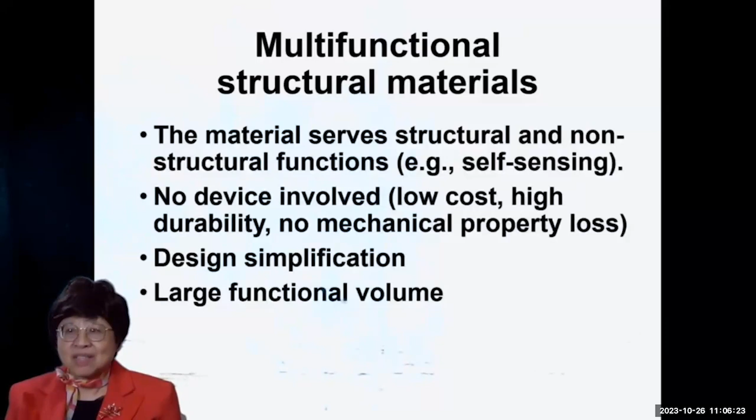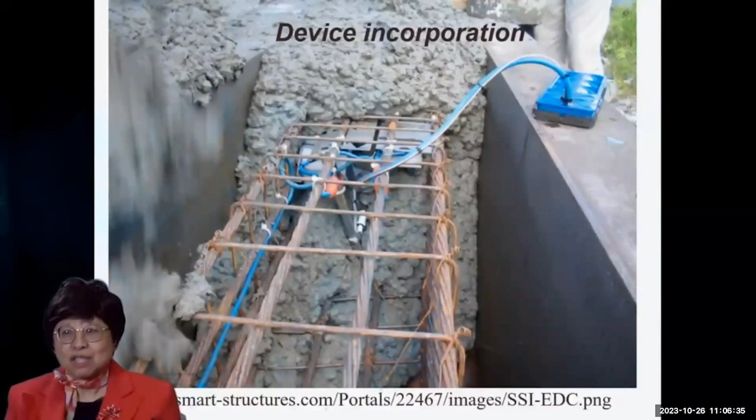If one incorporates or embeds a device in a structure, one has to do it while the structure is being fabricated, and subsequent repair might be difficult. In contrast, in self-sensing, there's no device involved. Rather, one measures certain electrical properties of the structural material using certain meters.

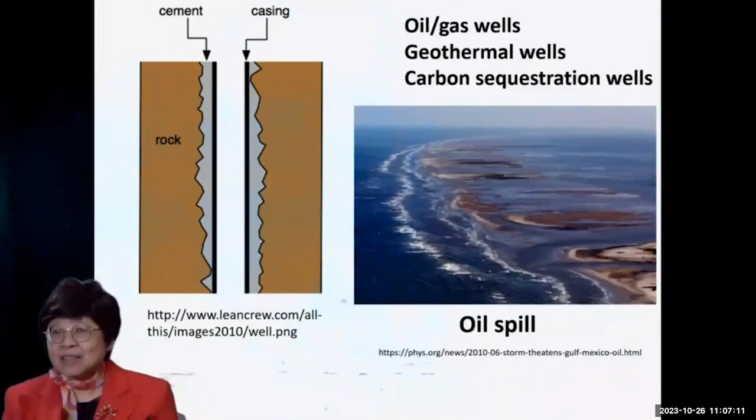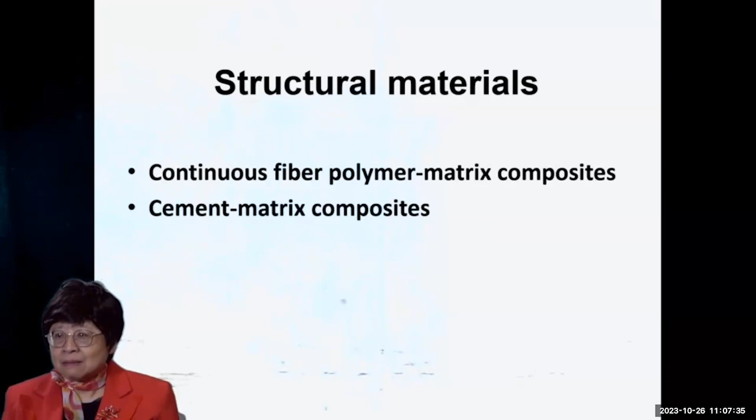The structural materials that I'll cover include continuous fiber polymer matrix composites as used for aircraft, and cement matrix composites as used for buildings and highways and so on. The attributes sensed include strain, stress, damage, and temperature.

The electrical measurements can involve measuring the resistance, capacitance, or inductance. I'm going to start with resistance.

Continuous carbon fibers are well known for their high modulus of elasticity, high strength, and low density, so they are widely used for lightweight structures. Aircraft increasingly use that, even cars and bicycles, golf clubs, and tennis rackets.

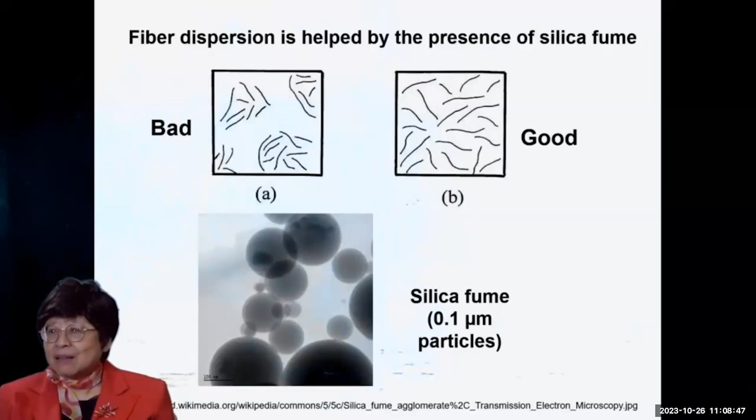Short carbon fibers look like this, and their dispersion in the cement is very important. It turns out that the addition of silica fume or fine silica particles into the mix helps loosen up the fiber clumps.

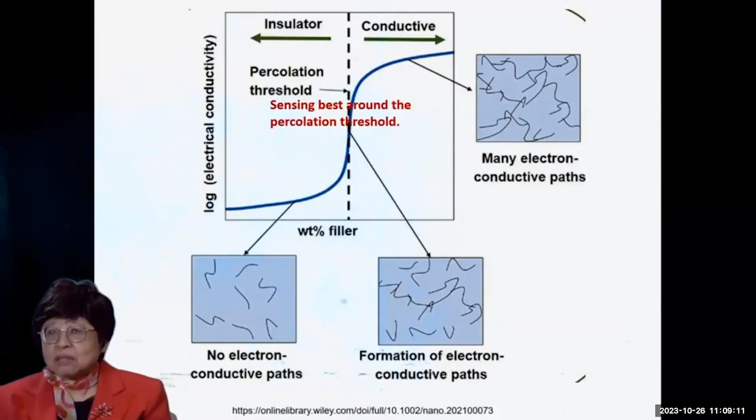The conductivity increases with increasing conductive filler content, in this case, short carbon fiber content. When it's above the percolation threshold, you have touching between the filler units, so it's conductive. The sensing is best if the composition is near the percolation threshold.

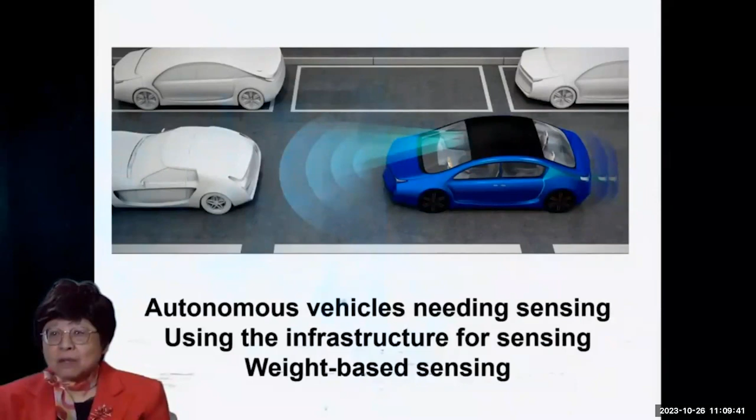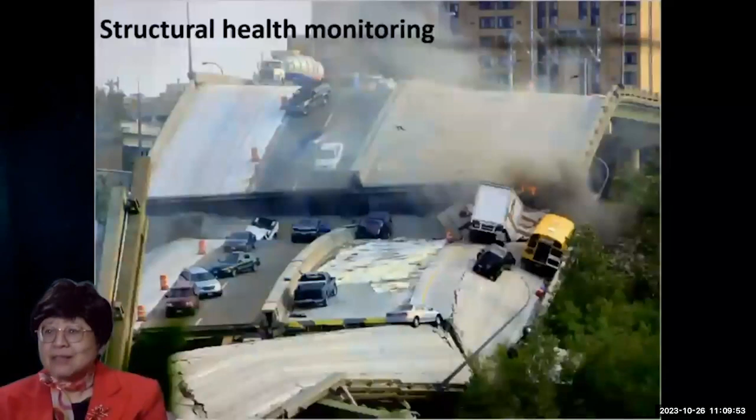Applications involve weighing the trucks as they move, also providing infrastructure to provide sensing for autonomous vehicles. This is weight-based sensing. One can also have building intruder detection provided by weight-based sensing with no camera involved, as well as structural health monitoring.

Electrical measurement sounds easy using a meter, but there are many pitfalls. For measuring the resistance, there are two methods: the 4-probe method and the 2-probe method.

As a result, there's no current going through the voltage probe, and the measured resistance excludes the contact resistance. However, if one uses the two-probe method, the measured resistance includes the contact resistance. And if one is trying to find out the effect of stress or heat on the resistance, it'd be even more troublesome for the two-probe method, because both the contact resistance and the specimen resistance may change at the same time.

Resistance-based sensing is largely based on piezoresistivity, which refers to the change of the electrical resistivity due to strain. The severity of this effect is called the gauge factor, which is the fractional change in resistance per unit strain.

There are three styles of resistance measurement: volume resistivity for sensing a volume, contact resistivity for sensing an interface, and surface resistance for sensing a surface region. I'll first talk about the volume resistivity.

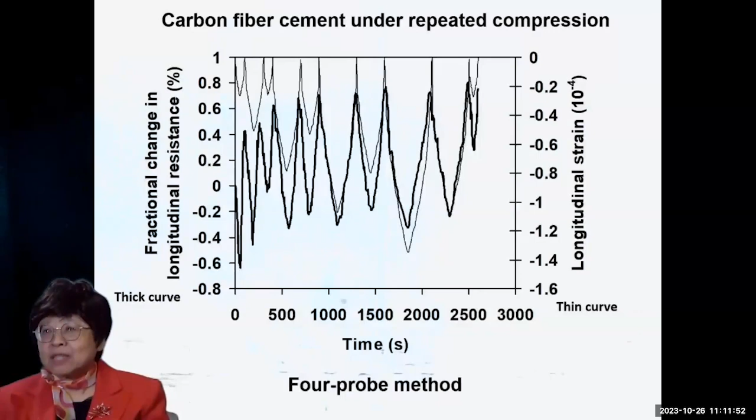This is carbon fiber cement under repeated compression. Shown in thin line is the longitudinal strain, and I have an arbitrary progression of strains at different amplitudes. The bold line is the resistance, and every time one compresses, the resistance goes down.

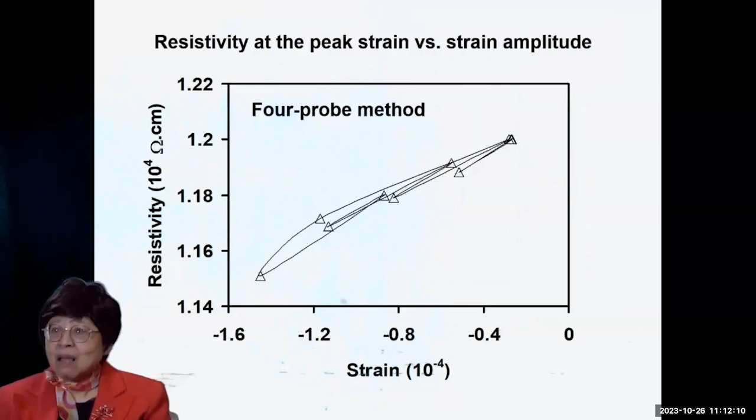I can plot the resistivity versus the strain amplitude, connecting the data points in chronological order, and one sees that it's kind of linear with not much hysteresis. That's done using the four-probe method. However, if one uses the two-probe method instead, it's a mess.

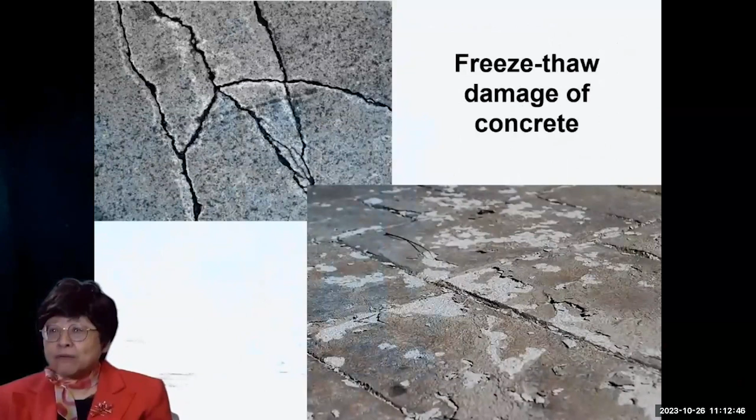Freeze-thaw damage is a trouble for concrete structures such as pavement, and this is because ice has lower density than water. We have been able to monitor the freeze-thaw damage in real time by resistance measurement.

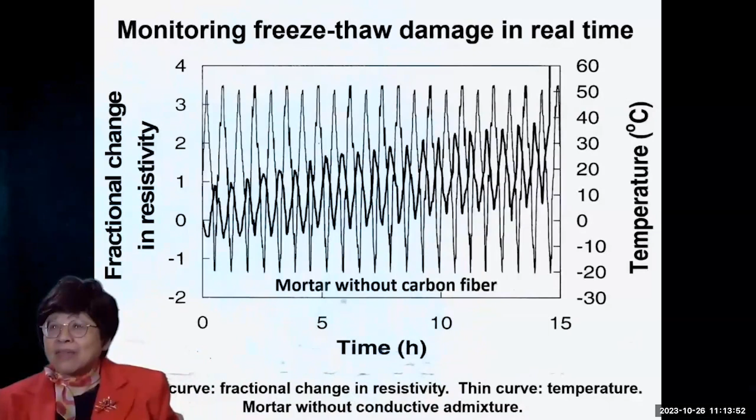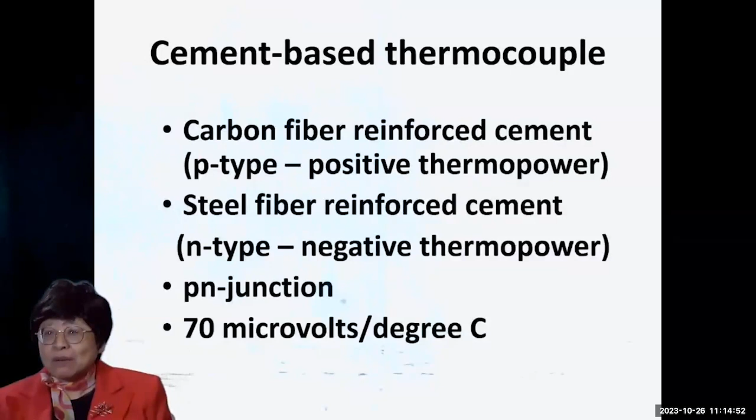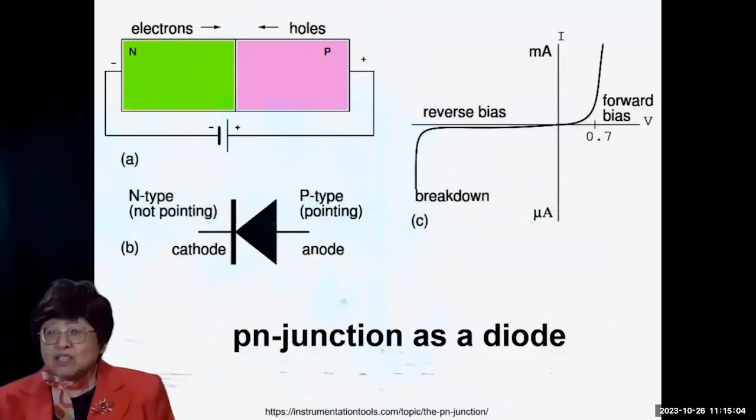Now, the p-n junction is famous in the semiconductor world as a diode. And for the cement-based p-n junction, we don't have a very beautiful diode, but there's some of that characteristic, with the current being more in one direction than the other.

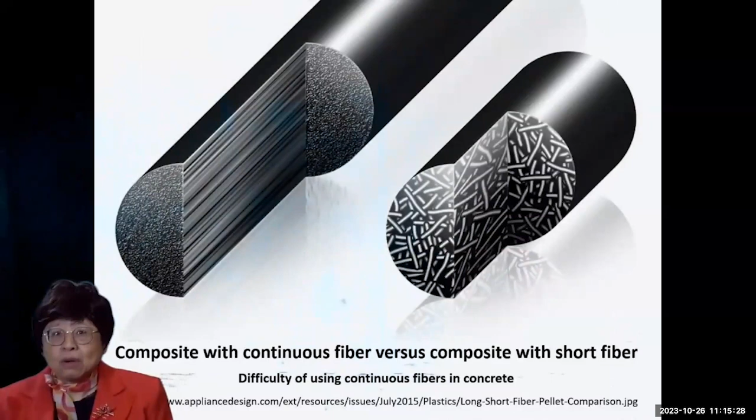Now let me turn to continuous fiber, which is more effective as a reinforcement than the short ones because the fiber-matrix interface is never perfect. Let's consider, say, epoxy, and we fabricate the epoxy matrix composite containing the continuous carbon fiber.

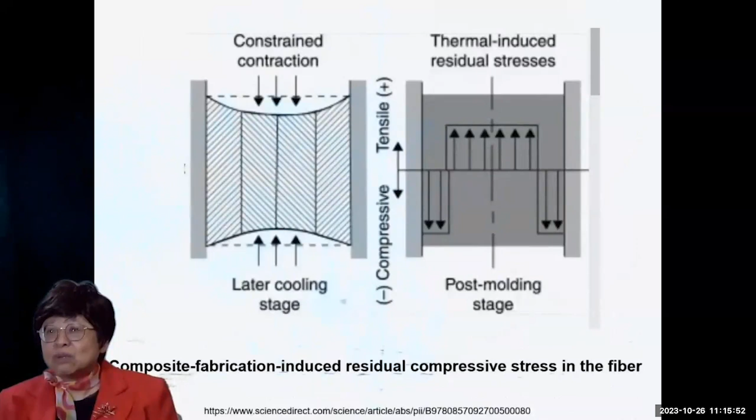During the fabrication, particularly during the cooling part, the resin contracts, and that results in residual stress that is compressive in the carbon fiber. One can ascertain that by resistance measurement, taking a single carbon fiber, embedding it in epoxy, and having the two ends of the fiber stick out to provide ABCD for the 4-probe resistance measurement.

And we do this measurement during tension on the single fiber. Indeed, during tension, the resistivity of the single fiber decreases, and it's reversible upon unloading. This decrease in resistance is because the tension is canceling out the compressive residual stress in the fiber.

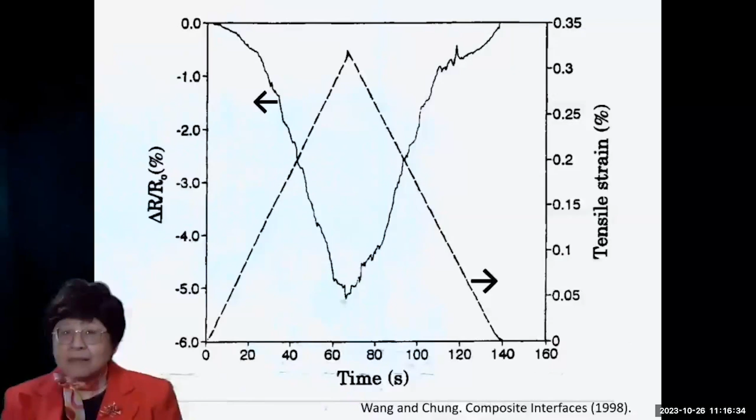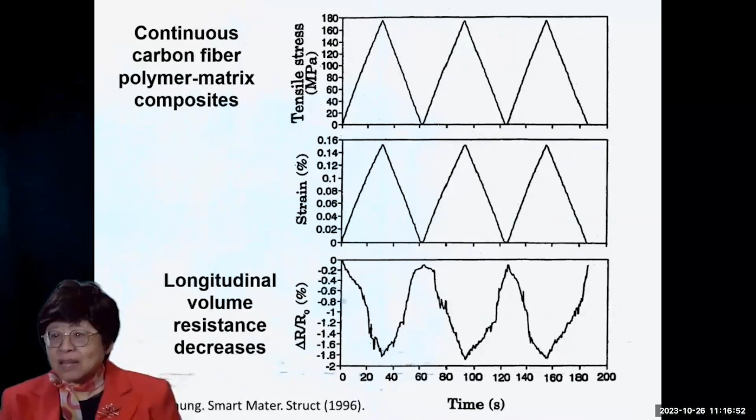This extends to the behavior of a laminate with continuous carbon fiber in epoxy. At the bottom, it shows the longitudinal volume resistance. It indeed decreases and is quite reversible, just like what we saw in the case of a single fiber.

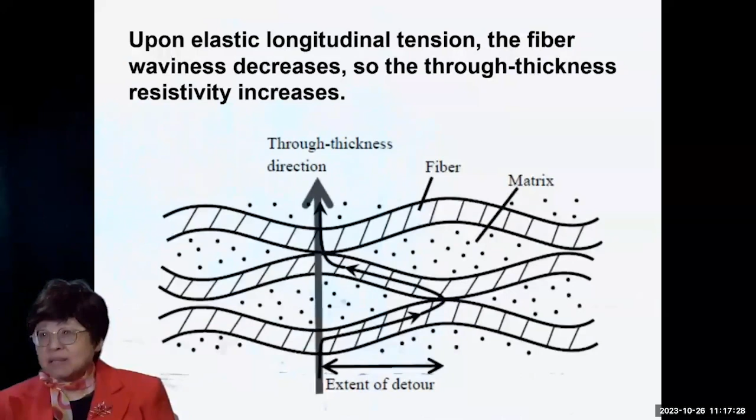Now, for a continuous fiber laminate, the carbon fiber is conductive, but the matrix polymer like epoxy is not conductive. In spite of that, the through-thickness resistivity is never infinity, because of fiber waviness, which causes fiber-fiber contact. So upon elastic longitudinal tension, that is horizontal tension in this picture, the fiber waviness decreases, so the through-thickness resistivity increases.

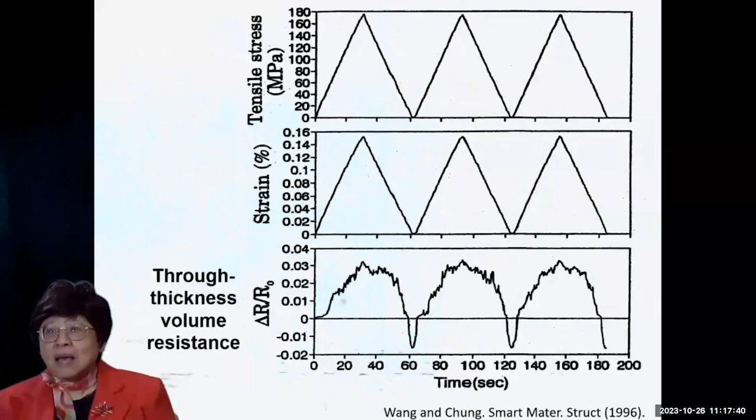And that's exactly what we see for the through-thickness volume resistance at the bottom here. That resistance indeed increases every time one tensions it in the horizontal direction.

Now, damage can occur in aircraft due to bird strike, for instance, and the damage can involve delamination as well as fiber breakage. We can monitor the fatigue by subjecting the composite to tension-tension fatigue, with the tension in the fiber direction, and measuring the resistance in the same direction.

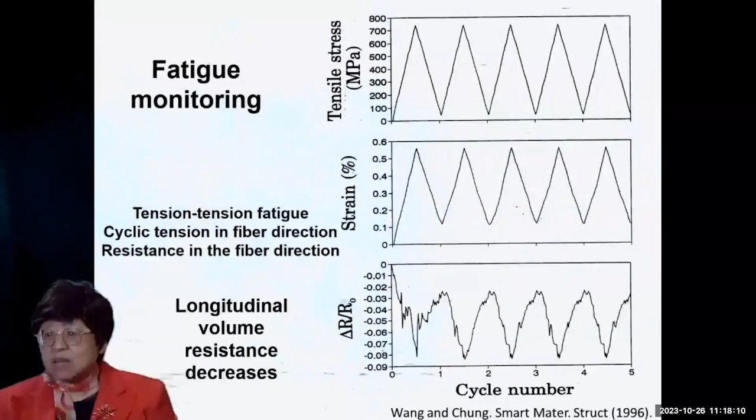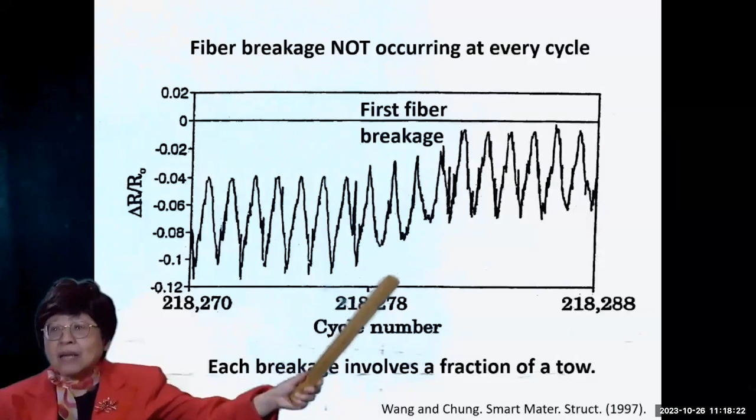So at the bottom is what I showed you before, but now I do it for many, many cycles. We see after 218,000 cycles, the first increase in the baseline resistance. In every cycle, the resistance goes down and up, but then the baseline shifts upward upon damage. This is fiber breakage, and each breakage involves a fraction of a tow.

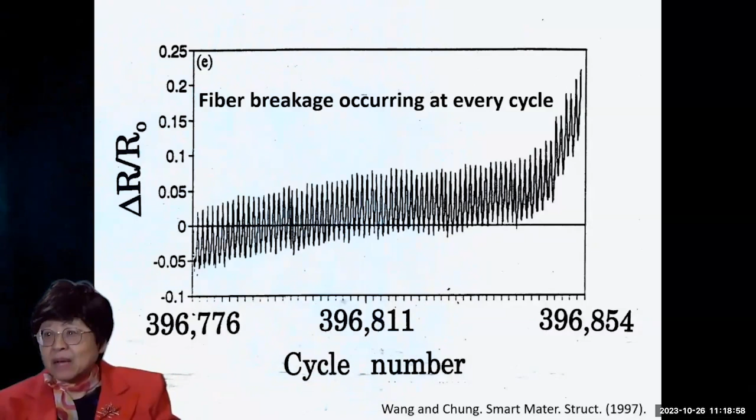Shown here, the bottom curve is the resistance down and up, the peak resistance in every cycle. We see that at about 50% of the fatigue life, the first spurt of resistance increase occurs, meaning that fiber breakage starts to occur at about 50% of the fatigue life. The upper curve is the modulus, and indeed the modulus goes down, supporting the fact that there is damage.

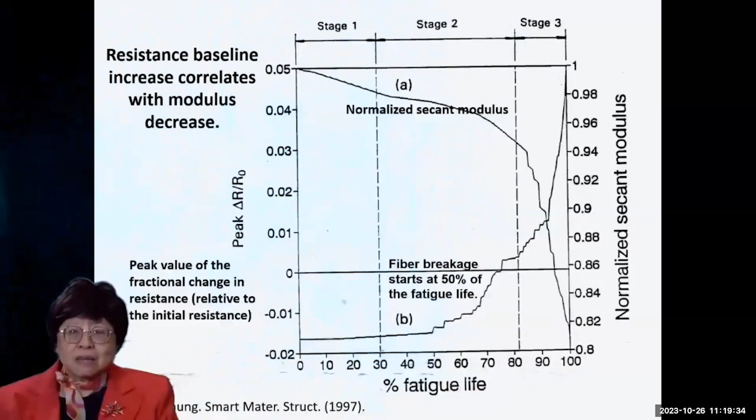Next, let's turn to contact resistivity measurement for sensing an interface. In a laminate, you have plies or laminae, and you have interfaces between the plies. These interlaminar interfaces are mechanical weak links. Any interface is associated with a contact resistance, and so does the interlaminar interface, which is actually a matrix-rich region.

With the matrix being insulating, such as the epoxy, the interlaminar interface resistivity is never infinity because of fiber-fiber contact across the interlaminar interface. And delamination decreases the interlaminar fiber touching, thereby increasing the through-thickness interlaminar resistivity.

We can measure the interlaminar contact resistivity by using this modified 4-probe method that I devised. I have 2 plies overlapping, and the overlap region is the interlaminar interface, and I have 4 legs sticking out to accommodate the 4 contacts for the 4-probe method.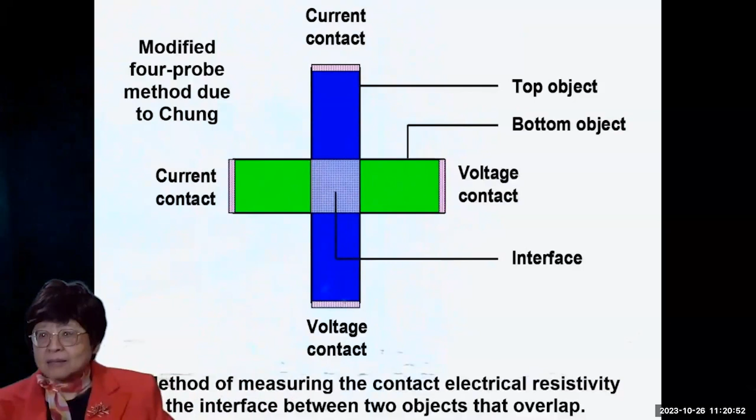The contact resistivity is the contact resistance times the contact area, which is this overlap area. Another nice thing about this technique is that one can have a 2D array of interlaminar interfaces, and so a 2D array of sensors, thus resulting in 2D spatially resolved sensing.

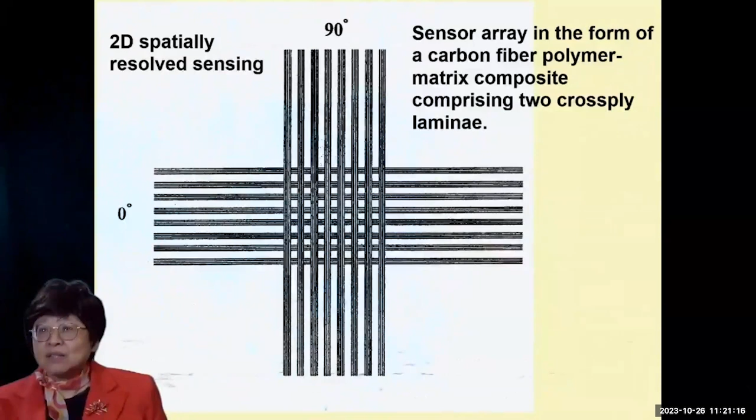It'd be nice to be able to monitor whether this joint is loosening or not, and this we can do by measuring the contact resistivity, with upon squeezing or compression in the through-thickness direction. Every time one compresses, and the compressive stress is shown in the curve below, the contact resistivity goes down because the squeezing increases the proximity between the plies.

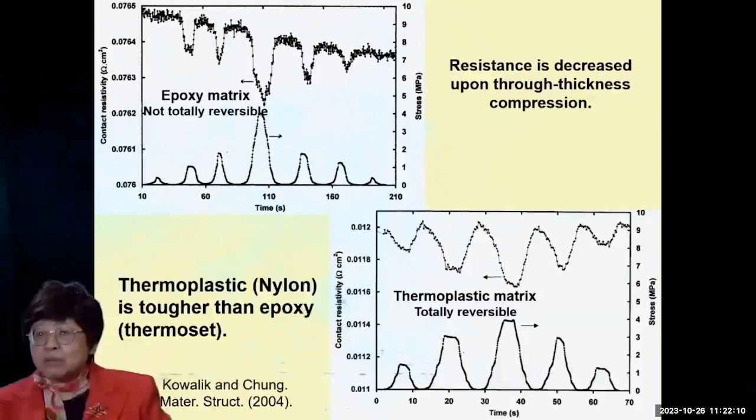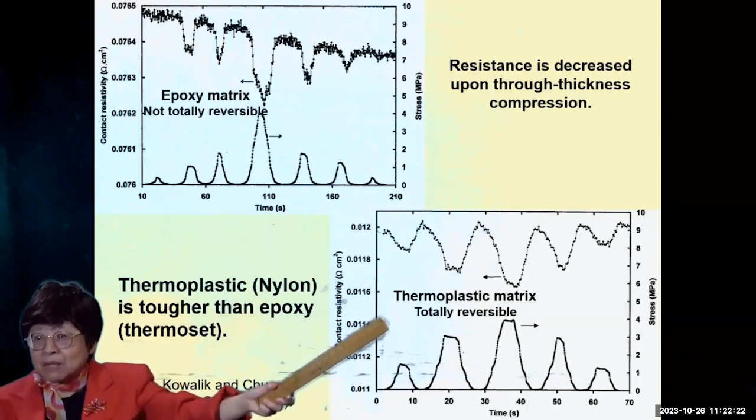However, the resistance decrease is not totally reversible in the case of an epoxy matrix composite. However, for a thermoplastic matrix composite, it's totally reversible. That is simply because the thermoplastic involves linear molecules, so it's tough relative to the epoxy, which is a thermoset and is brittle, involving cross-linking. So actually, it would be better off if one uses a thermoplastic matrix in place of the epoxy matrix.

Composite panels tend to be relatively thin, so measuring the through-thickness resistance is not so convenient. Measuring the in-plane resistance is much more convenient. We can actually measure the in-plane or longitudinal resistance in place of the through-thickness resistance and get similar effects.

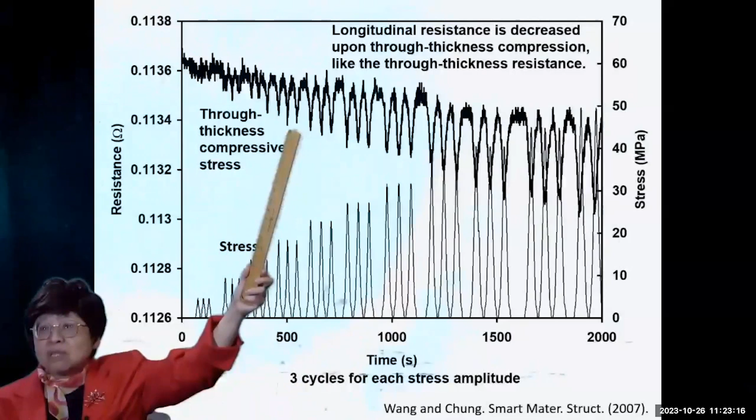This is again squeezing in the through-thickness direction, and the longitudinal resistance, just like the through-thickness resistance, decreases every time one squeezes. That is because the through-thickness resistivity decreases due to the enhanced through-thickness fiber proximity, thus promoting the longitudinal current path detour necessitated by the imperfection, and thus decreasing the longitudinal resistivity.

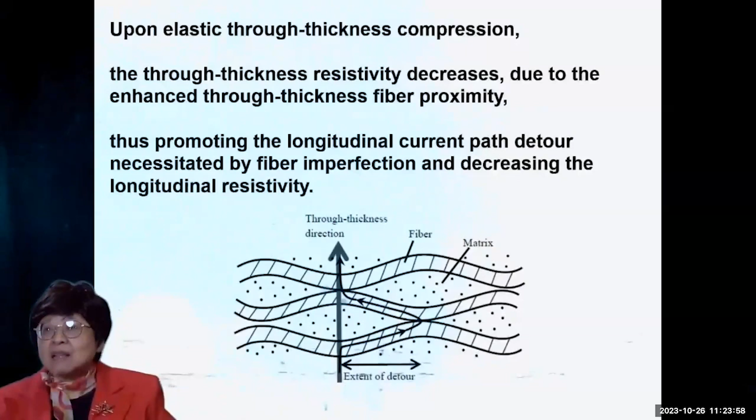There's always some little defects in the fibers, and when a defect is encountered, the current path can detour from one fiber to the next across this interface between the fibers. So if there are more fiber-fiber contacts, this detour would be facilitated, thus decreasing the longitudinal resistivity.

The irreversible decrease in that contact resistivity is due to the irreversible increase in the fiber-fiber contact across the interlaminar interface.

In addition, this interlaminar interface can serve as a thermistor, that is, a temperature measuring device based on the resistance varying with the temperature. So this is the contact resistivity versus temperature. Upon heating, it decreases because the chance of electrons jumping across the interlaminar interface is enhanced by the heating.

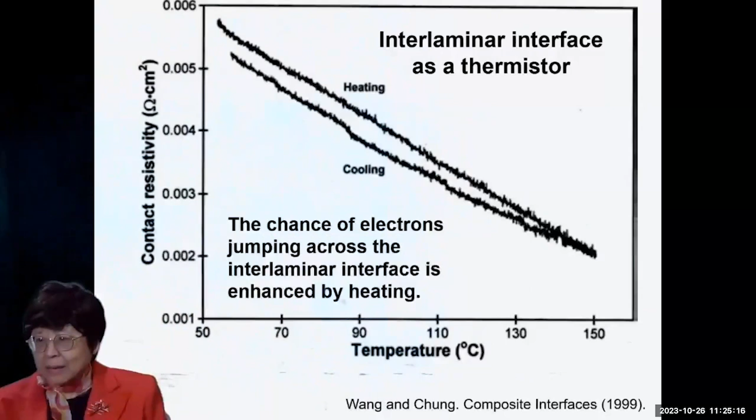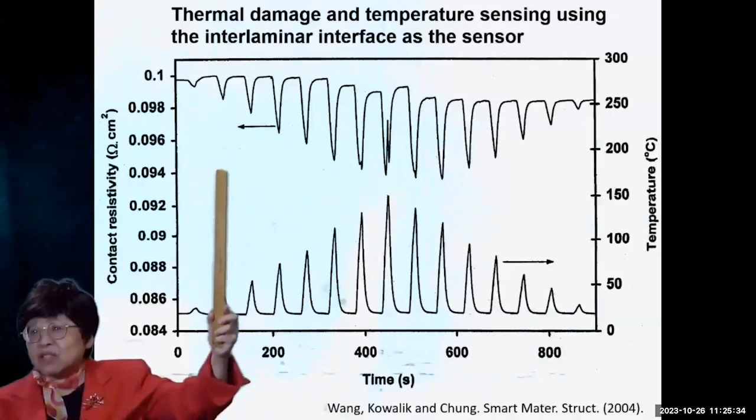Not only detecting the temperature, the contact resistivity responds to the thermal damage of that interface. Here at the bottom shows temperature variation, and the upper curve shows the contact resistivity variation. Every time the temperature goes up, the contact resistivity goes down. But at the highest temperature, there's an upward spike in the contact resistivity indicating damage.

And if the highest temperature is a little higher, the thermal damage becomes more and the spike becomes more. This is even more. So we have temperature and thermal damage sensed at the same time.

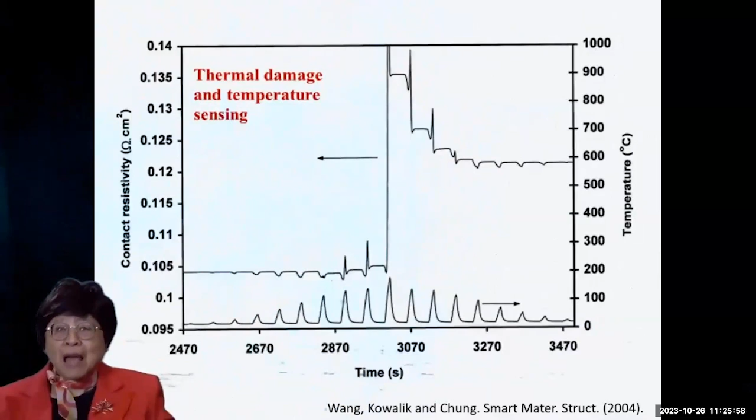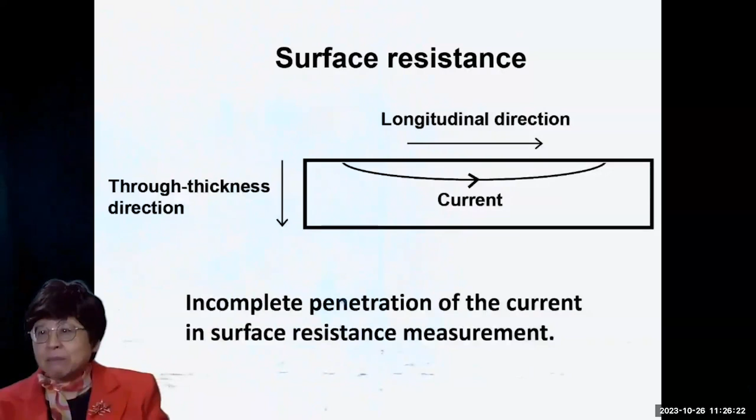In spite of that, the surface resistance is very suitable for tracking flexure, because under flexure the tension side and compression side feel opposite stresses—one is tension and one is compression. One can put 4 electrical contacts on each of the two opposite surfaces to measure the top surface resistance and the bottom surface resistance.

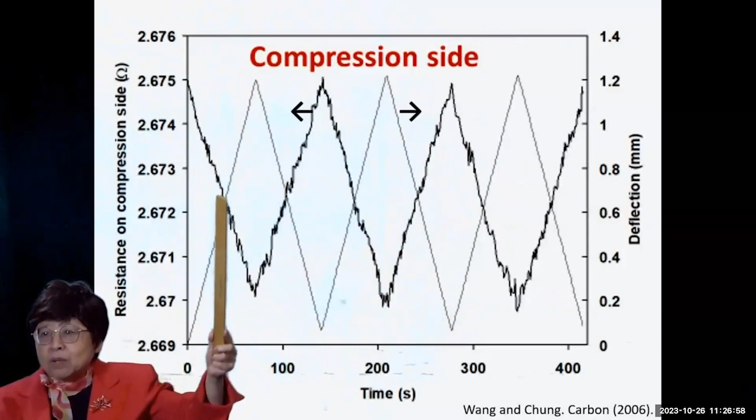This shows the compression surface resistance in bold line. Every time one flexes, that compressive surface resistance goes down, and the opposite for the tension side surface resistance. The reason is this: upon elastic flexure, the tension surface resistance increases due to fiber waviness decrease, because you are stretching horizontally, so the fiber waviness decreases and the current penetration decreases. Under compression, it's just the opposite.

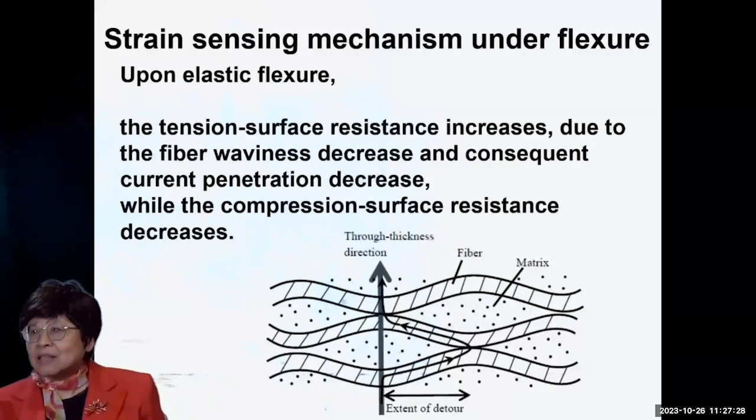In one scenario, we can have the baseline resistance of the tension side surface resistance climbing up cycle by cycle, and that is due to minor damage. So one can actually see the strain effect and the damage effect simultaneously.

Now, if instead of measuring the surface resistance one measures the volume resistance, it would not be very wise, because the volume resistance gives you the two opposite effects on the two sides averaged out. So it wouldn't be very suitable at all.

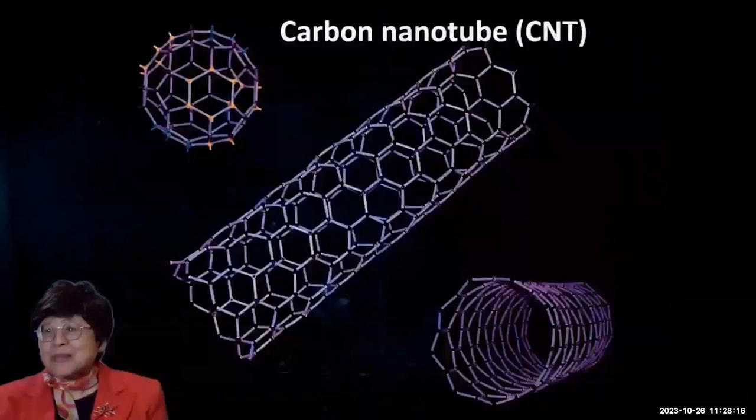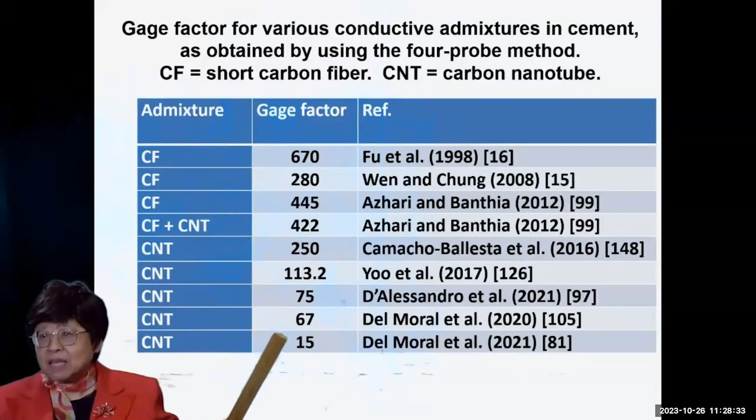Now, there's a big interest in using carbon nanotube in composites. We have looked at the effect of adding carbon nanotube to cement in terms of the piezoresistivity as described by the gauge factor. You can see that adding carbon nanotube (CNT) to the short carbon fiber (CF) doesn't improve anything—in fact, the gauge factor decreases. The winners are still the carbon fiber, no carbon nanotube at all.

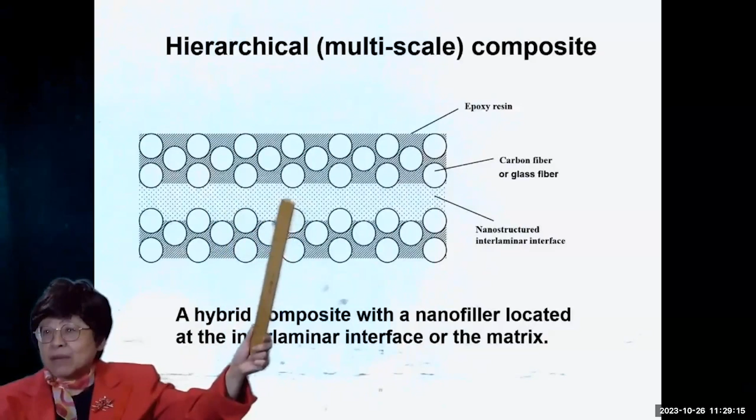The reason for the carbon nanotube not helping that much is their intertwined morphology, making the dispersion of the carbon nanotube not easy. On the other hand, if you want to modify the interlaminar interface, which is a small region, you need a nanofiller. One can put nanotube or other nanofillers such as carbon black there, and that forms a hybrid composite, which is called a hierarchical or multi-scale composite.

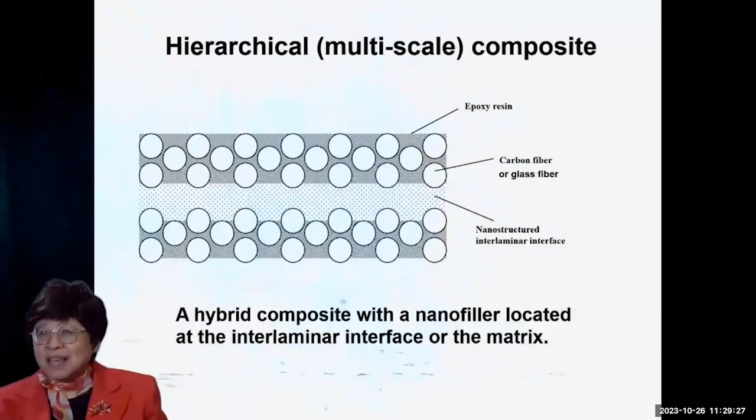However, such material modification has disadvantages because of the increased material and processing cost. Also, the applicability is to new structures only, not to existing structures, because the existing structures would not have the needed modification.

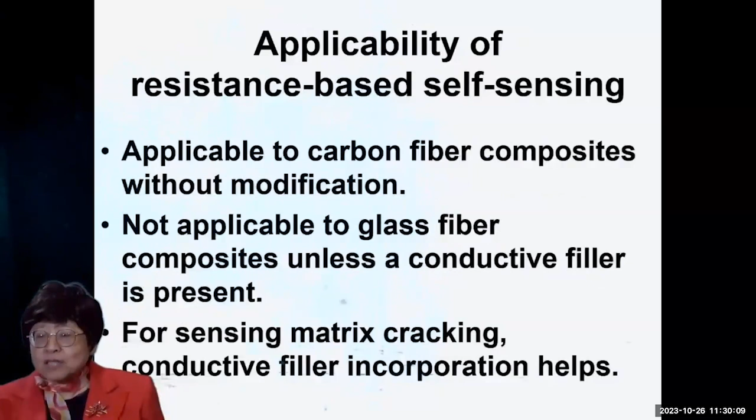The application of resistance-based self-sensing is good for carbon fiber composites without modification because it's already conductive, but it's not applicable to glass fiber composites unless a conductive filler is present—that means modification. For sensing matrix cracking, conductive filler incorporation would help. Resistance measurements, though, have limitations.

Metals are very low in resistance, so sensitivity would be limited by the need to measure very small changes in the resistance. Also, it's not applicable to polymers or ceramics, which are not conductive. Also, one needs intimate contact between the electrodes and the specimen.

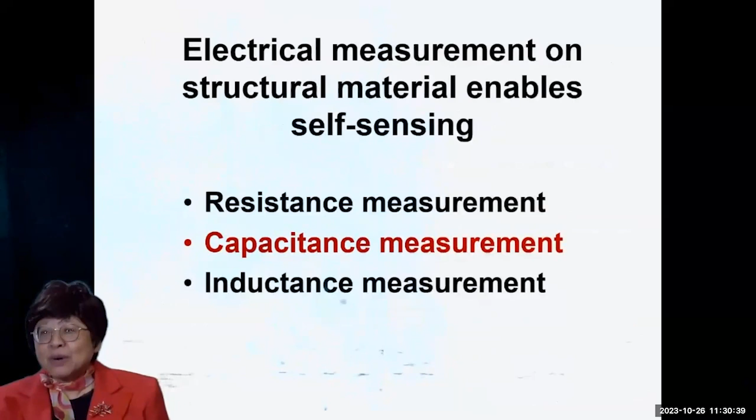So let me now turn to capacitance measurement. The conductivity or resistivity relates to the resistance, but the permittivity is a material property that relates to the capacitance. A conventional conductor does not polarize because there's no electron-atom interaction—the electrons just loop around.

But here at the bottom is a case where there is a degree of interaction between a fraction of the electrons and the atoms. As a result, there is polarization. This makes a conductor a polarizable or dielectric material.

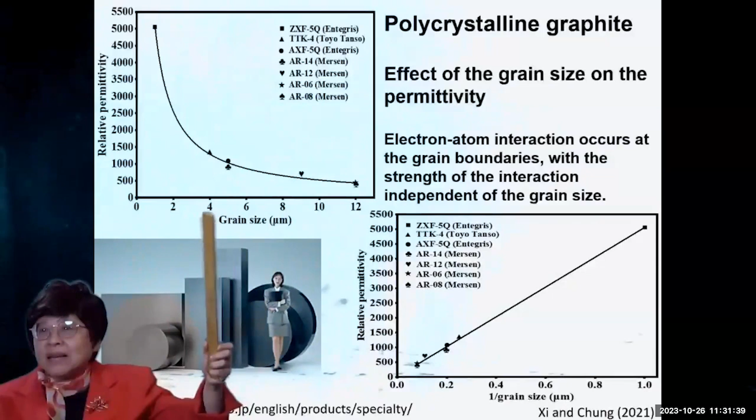This is a polycrystalline graphite, showing the relative permittivity decreasing a lot with increasing grain size, increasing a lot with decreasing grain size. If one plots it versus 1 over grain size, which relates to the grain boundary area per unit volume, one gets more or less a straight line. That indicates that the electron-atom interaction occurs at the grain boundaries.

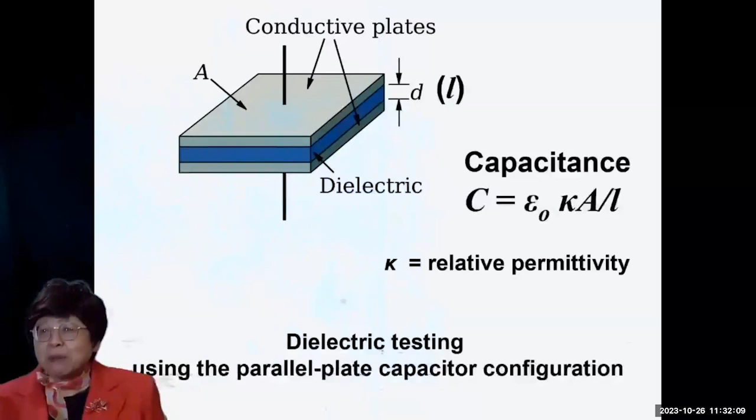Now, dielectric testing involves a parallel plate capacitor configuration, where C is the capacitance and kappa is the relative permittivity. But for a conductor, one needs to be careful because an LCR meter is not designed for measuring the capacitance of a conductor. So one needs to put a thin insulating film between the specimen and an electrode in order to make the LCR meter behave.

One can decouple the capacitance due to the specimen and the capacitance due to the interface by measuring the capacitance C at 3 or more different thicknesses and plotting 1/C, because this is a matter of capacitors in series, and the slope relates to the permittivity. So we can decouple between the capacitance due to the specimen and the capacitance due to the interface.

Now, poling is not needed for conductors, in contrast to ceramics and polymers, which need poling. That's because the polarized state of a conductor is inherent due to the space charge polarization occurring at interfaces like grain boundaries. And because of no poling, there's no depoling.

Capacitance-based self-sensing is applicable to all dielectric or polarizable materials, regardless of the resistivity. That is beautiful. Both conductors and insulators can be amenable to capacitance-based self-sensing.

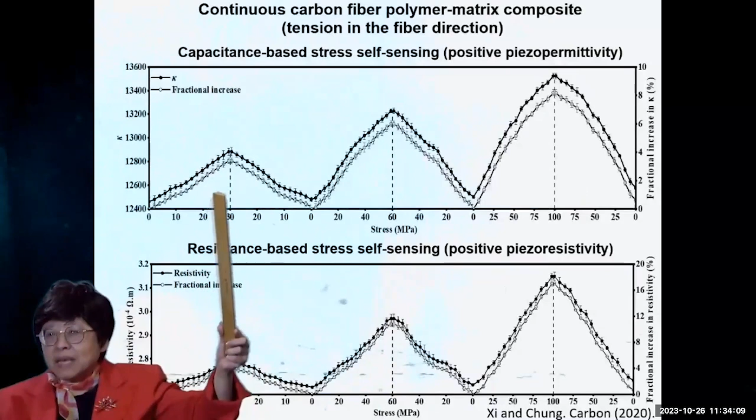Piezo permittivity means the effect of strain or stress on the permittivity. This shows the relative permittivity kappa versus the tensile stress at 3 different stress amplitudes, and the permittivity indeed increases reversibly. This is piezo permittivity. At the bottom is the same material showing the piezo resistivity, with the resistivity increasing quite reversibly upon tension. And the resistivity and permittivity are actually related through the Kramers-Kronig relationship.

For cement, the capacitance-based sensing also works. Here we use 2 coplanar electrodes and measure the in-plane capacitance, because coplanar electrodes are more amenable to structural implementation for large structures than sandwiching electrodes.

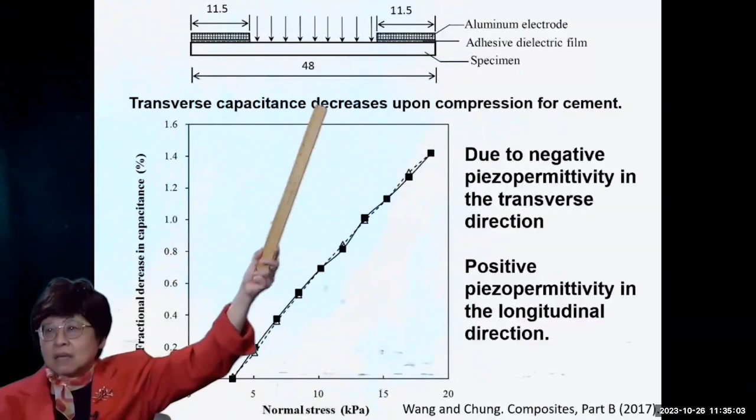The in-plane capacitance actually decreases upon the normal compression, and that's because of the negative piezo permittivity in this direction. But if one considers the longitudinal or vertical capacitance instead, one sees the capacitance increasing. So this shows the fractional decrease in the capacitance in the transverse direction. The more the normal stress, the more is that decrease.

Now, 3D printing needs stress or defect sensing very badly because there are defects, particularly those defects that are between the printed layers and subsurface defects. Those cannot be seen by cameras, and cameras are the conventional methods that people use for sensing defects in 3D printed material.

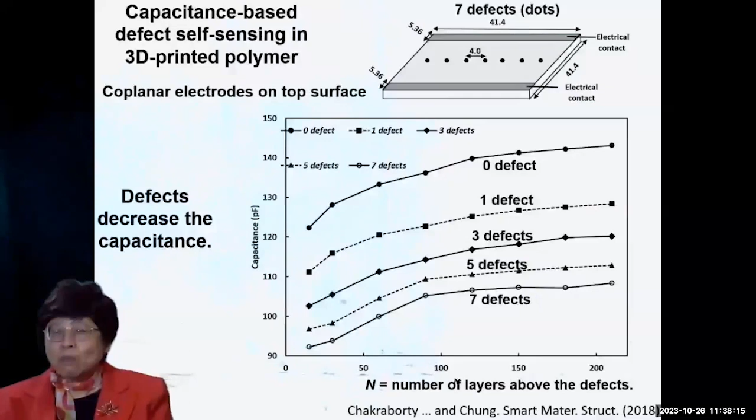So we are able to relate the capacitance to both the number of defects and where the defect locates.

We can also do damage sensing or defect sensing for cement using 2 bars. Each is an electrode, but each bar has 9 segments in it, and again it's coplanar electrodes. This sample is perfect in this region, and this square region on the right is defective, having some foamy stuff

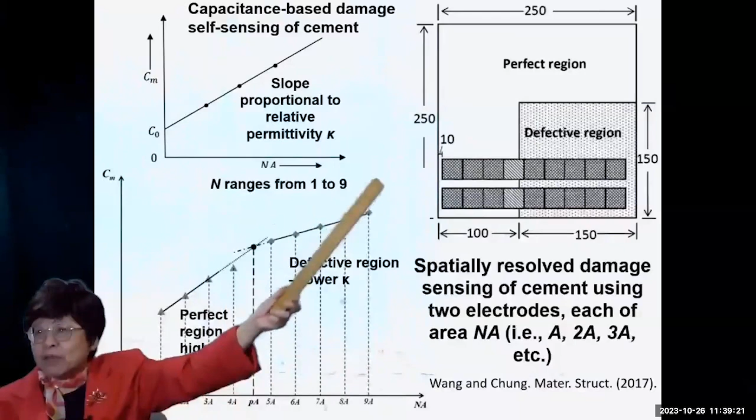incorporated in that region during the fabrication. We measure the capacitance using different numbers of these segments: A, or 2A and 2A, or 3A and 3A, and so on. So this is the capacitance versus N of the NA, and the slope relates to the permittivity. We see that the slope changes: it's a bigger slope for the perfect region and a shallower slope for the defective region, because the permittivity is smaller in the defective region.

So we have spatially resolved damage sensing of the cement using capacitance-based self-sensing.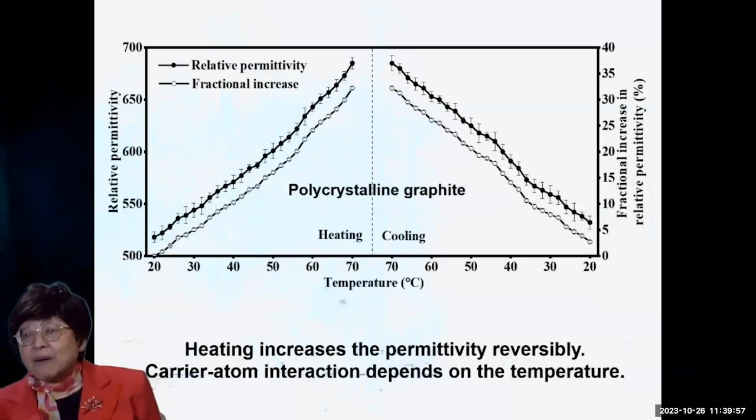Pyropermittivity means the effect of temperature on the permittivity. This shows the permittivity versus temperature up and down for graphite, and the permittivity increases quite reversibly. That is because the carrier-atom interaction depends on the temperature.

Now I turn to inductance measurement. I've started this inductance research in March of this year, so this is really new.

Twisting enhances the handleability of fiber tows or yarns. The twist level is the number of twists per inch of the tow, and that's TPI, standing for twist per inch. The twisted carbon fiber is used for weaving to make fabric.

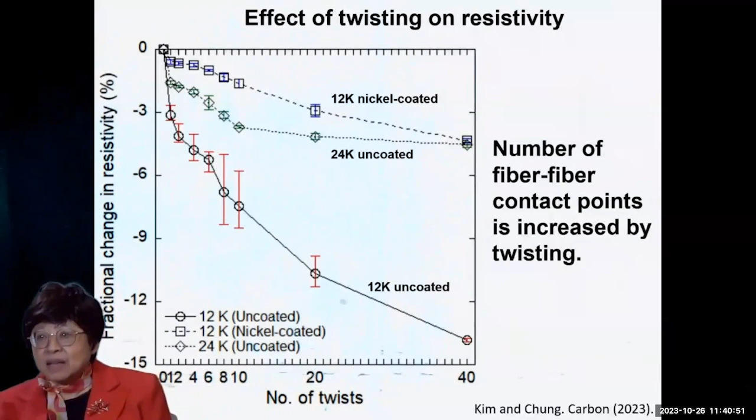This shows the resistance of the tow decreasing with increasing number of twists. That decrease in resistance with twisting is because the number of fiber-fiber contact points is increased by twisting, and this effect causes the inductance to increase.

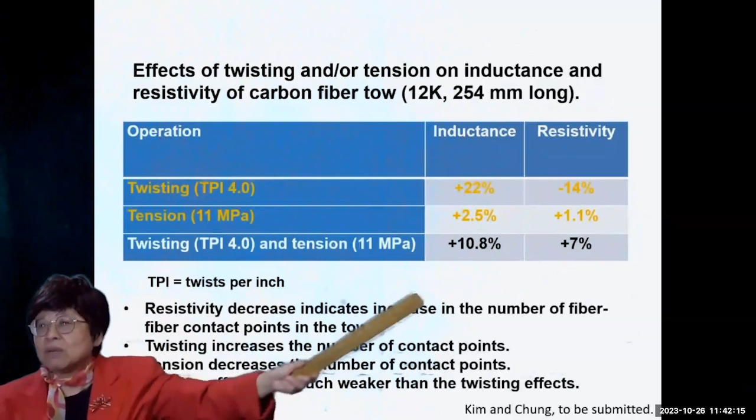Now the resistivity likewise increases upon tension, and the effect is greater with more twisting. Let's compare these fractional changes in inductance and resistivity. The twisting, or the resistivity decrease, indicates an increase in the number of fiber-fiber contact points in the tow, since twisting increases the number of contact points. However, tension decreases the number of contact points, so the resistivity increases for tension but decreases for twisting.

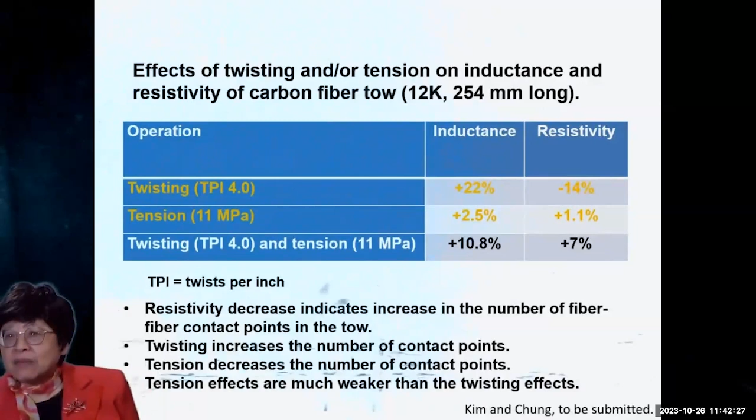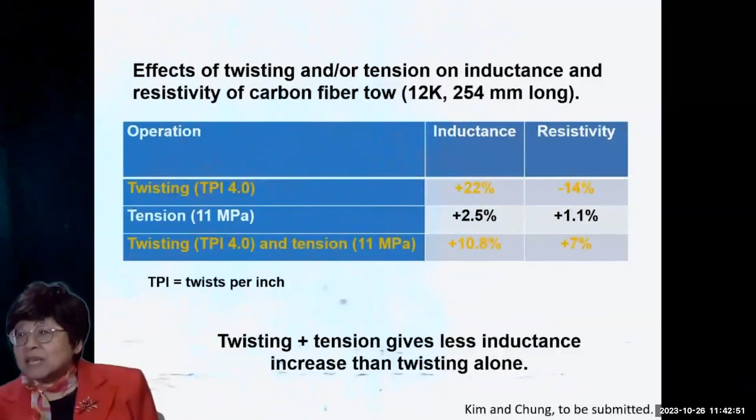Note that the tension effects are much weaker than the twisting effects. Let's compare tension alone versus tension plus twisting: tension increases the resistivity regardless of the twisting. Comparing twisting versus twisting with tension, one sees that twisting plus tension gives less inductance increase than twisting alone.

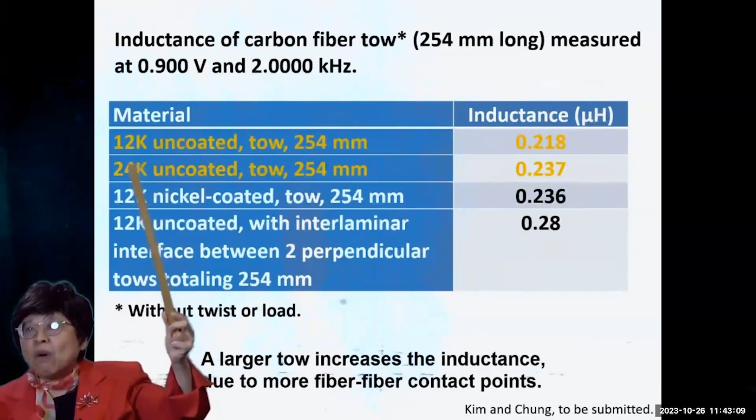Let's look at the actual inductance values rather than just the fractional changes. Comparing the 12K and 24K fibers at the tow, having more fibers in the tow gives more inductance, and that makes sense because a larger tow would increase the inductance due to more fiber-fiber contact points.

Comparing uncoated carbon fiber versus nickel-coated carbon fiber, the nickel coating increases the inductance, and that's due to the magnetic character of the nickel. The bottom case is that of the uncoated fiber involving two tows that are perpendicular to one another and overlapping to form an interlaminar interface.

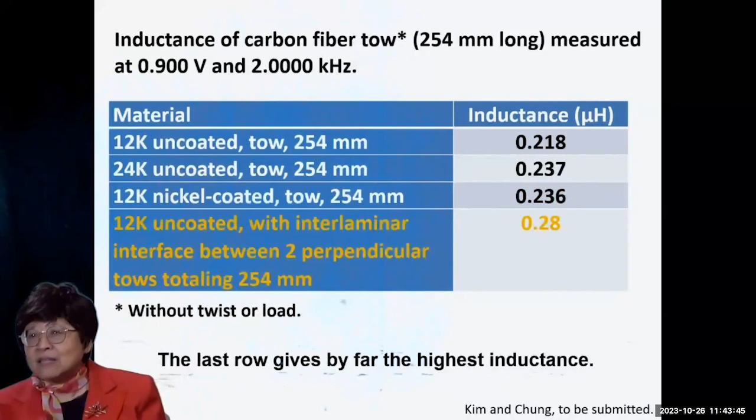And this configuration gives by far the highest inductance. This is that configuration: you have two tows, two laminae, perpendicular to one another and overlapping here, and this is the interlaminar interface, and we have epoxy there.

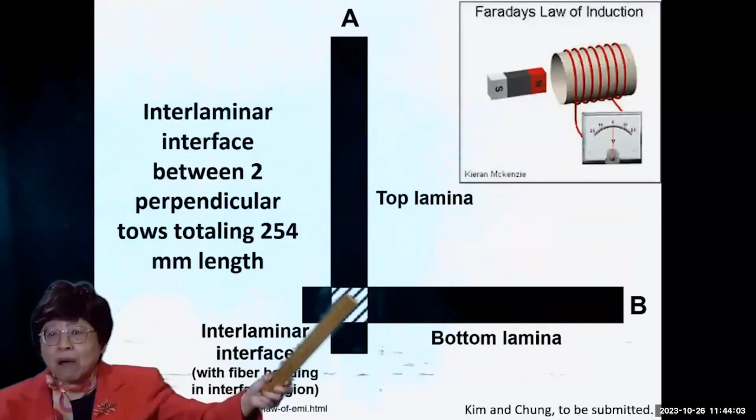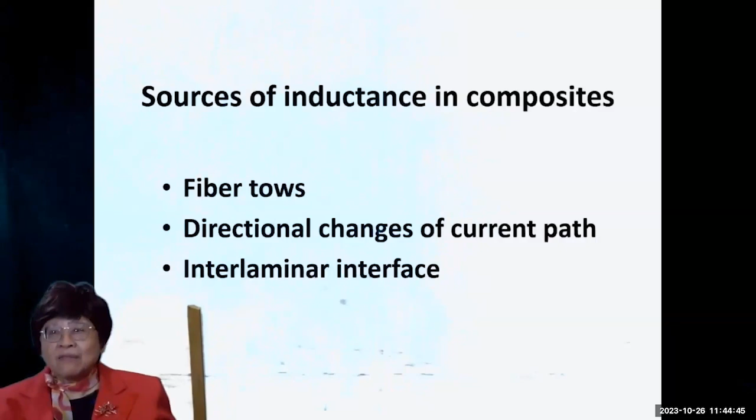This change in direction alone helps to increase the inductance, just like the classical inductor coil, in which the current direction keeps changing inside the coil—that's Faraday's law. In addition, inside the interlaminar interface region, you have fiber bending occurring, and that also helps increase the inductance. So there are several sources of inductance in composites: the fiber tows themselves, the directional changes of the current path, and the interlaminar interface.

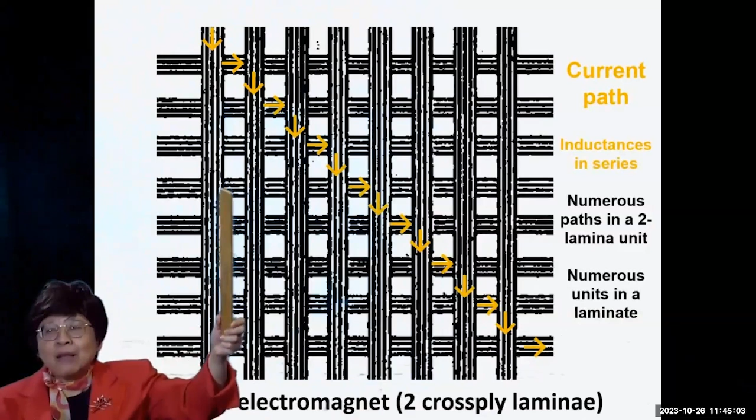So let's extend from this configuration to that of a composite laminate involving two laminae, the fibers in cross-ply configuration. There are many interlaminar interfaces, and we have the current path shown by these arrows, going between the top ply and the bottom ply, and also going through the interlaminar interface. By having a current path like this, you are really having a lot of inductors in series, so it's additive in terms of the inductance.

One is not limited to one such current path. There can be many different such current paths, maybe parallel to one another, for the same two-lamina unit, and we can have multiple two-lamina units in the same laminate. So potentially one can build up the inductance quite a bit. And the inductance means the capacity to make an electromagnet.

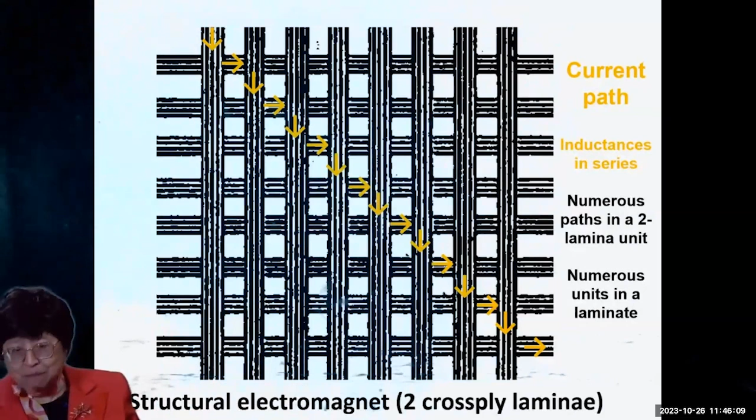So we are envisioning a structural electromagnet, which is a term that I invented, using a structural composite actually without modification to be an electromagnet. There are many possible applications of structural electromagnets because magnetic fields are needed for numerous applications, such as motors, generators, transformers, lifting magnets, and magnetic actuation, meaning self-actuation. So this is beyond self-sensing—it means an unprecedentedly high level of smartness in structures. And this is just my dream. It's going to be my future work, I hope.